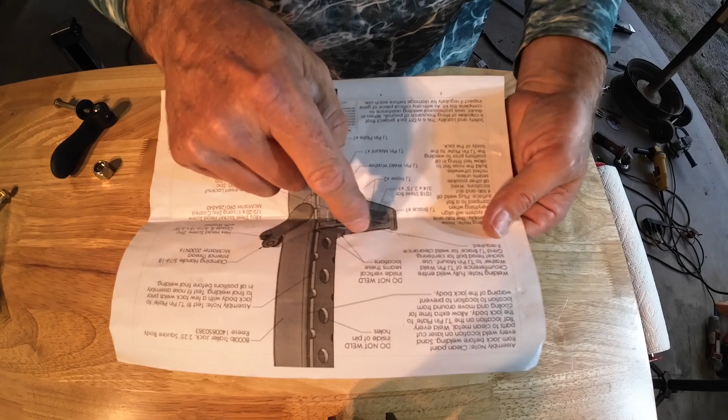Okay guys, we've got one built here and we've got one that we haven't put together. I'm going to show you just how this goes together so you can see it in your mind, and how it works. Because the directions are very good, but you have to really pay attention to every word here and all the arrows. It's a little hard to see, especially with my older eyes, and the directions are a little bit out of order, so we're going to talk about that.

I do want to talk about the mistakes we made, especially because we didn't make all the mistakes with this that you can make, but we made some, and we're going to talk about most of the mistakes you can make. And I'm not like a fabricator, but I'm not a beginning welder either. I've welded a lot of things over the last 30 years, and this has a few tricks to pay attention to, okay? So let's get into those.

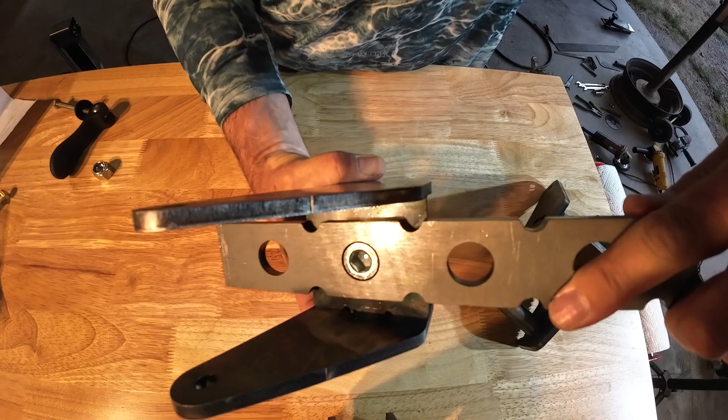All right, so this one's complete right here, and there's a few things to pay attention to. You can see that this is where this nut needs to end up, because this is what indexes into your pins on this, okay? And that's what that looks like. It goes all the way through, so I was worried it's open on that side, and I was wondering, should I weld that in? But I don't think anybody's doing that because it still seems to be plenty strong.

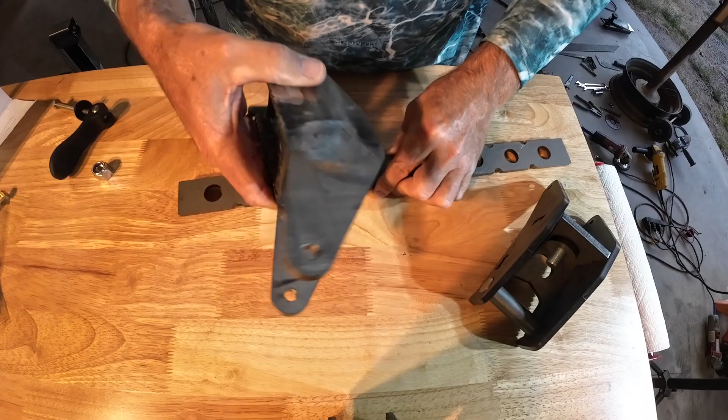And so you can adjust it, of course, up and down, and it's nice and flush, so that's the right distance. Which side you put this washer on and weld it on is important. How much you weld around it is important. Leaving that nut off when you're welding it on is important as well. How much to weld this around. We welded this cross rod here on the outside and the inside. We welded everything on both sides that we could.

Where you don't want to weld is in this side here with the small holes, okay? So don't weld that joint and that joint, because that could potentially interfere with it sliding up and down here. This is what slides against the jack side, so make sure to not weld there. So I'm just going to put this together so you can kind of see how it goes together, almost like a little puzzle. All right, so this vertical piece goes right here, okay?

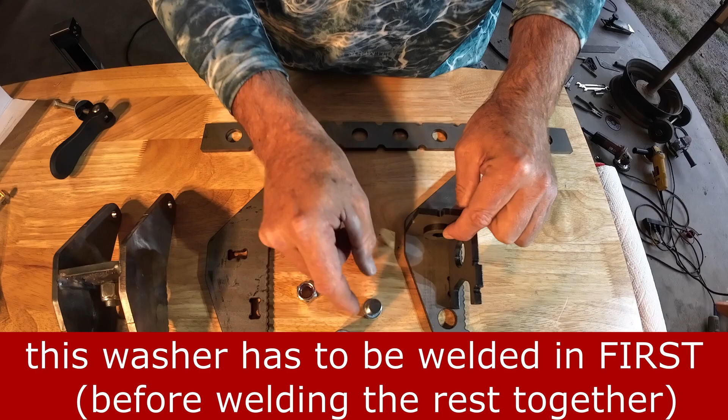This piece with the fork goes forward toward the big hole here. Now, eventually this will be welded in once you're assembling this for final welding, but this is how the bolt looks. And the nut, not going to get that screwed all the way down, but basically the bolt head goes toward the small hole, the nut goes toward the big hole, and the big steel washer goes toward the big hole as well on that side, okay? So we can just leave that sitting in there.

This piece you can drop in right here, and it's pretty tightly engineered, so you've got to kind of finagle it, mess with it a little bit to make sure it fits tight. Now this cross rod just slides through here like that, okay? Now let's pay close attention to this, because once you have it in your hands there's some play here. And you don't want to get your holes misaligned on either end. So how do we keep from doing that?

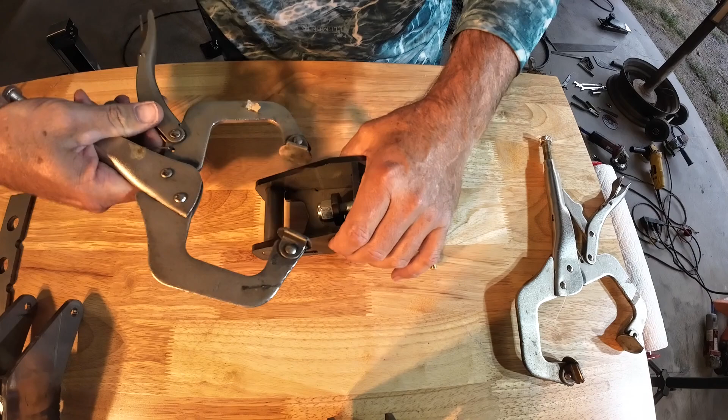The way we did it on the first one worked really well for us. We took this and set it in place. We took the little bolt that goes in the back and ran it through as well. That helps keep it in alignment. But I think the most important thing is setting it on a flat surface here, because that kind of lines everything up. That lines up this with this. And then we took our clamps and clamped it in a couple places before we tacked it.

Okay, now you clamp it here and it's going to try to spread back here, right? So we've got to clamp it sort of right past this piece, like here. Maybe a little bit tighter there. Okay, now look at that. Either my table's crooked or it moved a little bit when I clamped it. So let's unclamp it.

Just kind of hold it in place there. Clamp it there. Clamp it there. Now there's just a tiny bit of rocking, just a tiny, tiny bit. Now the question is, will these slide in and out easily? They don't cross over.

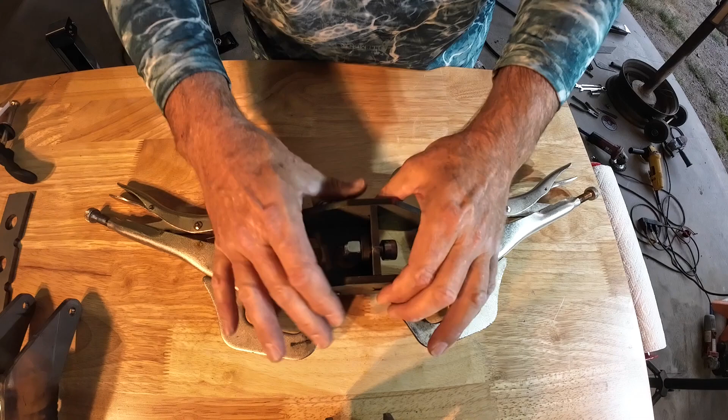They're not jamming. We're not having to drive anything in. Now that we have it true, I would go ahead and tack it here, here, here, here, then flip it over and tack it on the other side, and just get it tacked in. Maybe tack these outer sides as well, these outer holes. And then once it's all tacked in, we can take the clamps off and then start getting it burned in.

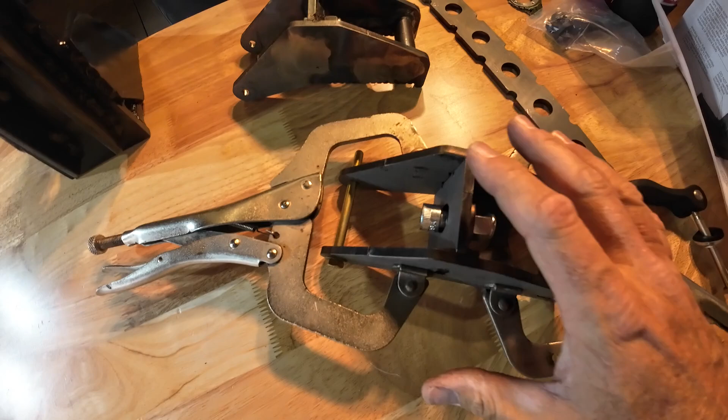Actually, on this first one, we left the clamps on as much as we could just to make sure it stayed nice and true. And this one's pretty good. And obviously, before you're going to assemble this, you're going to flap disc this down. We used, I think, 120 grit flap disc, which worked well, made it nice and shiny.

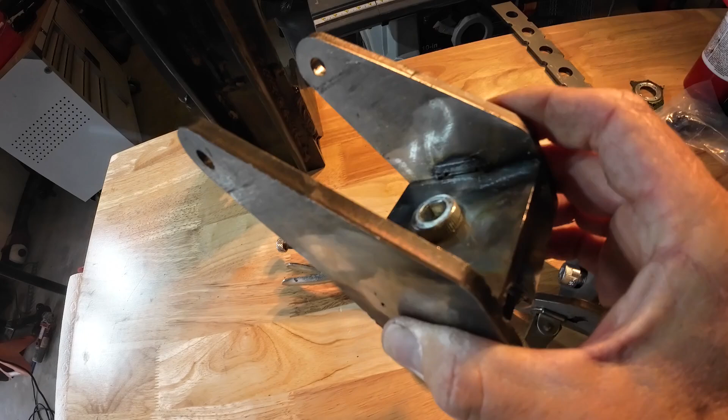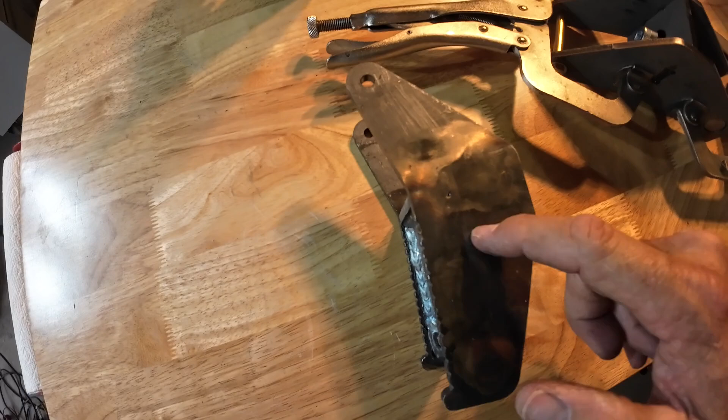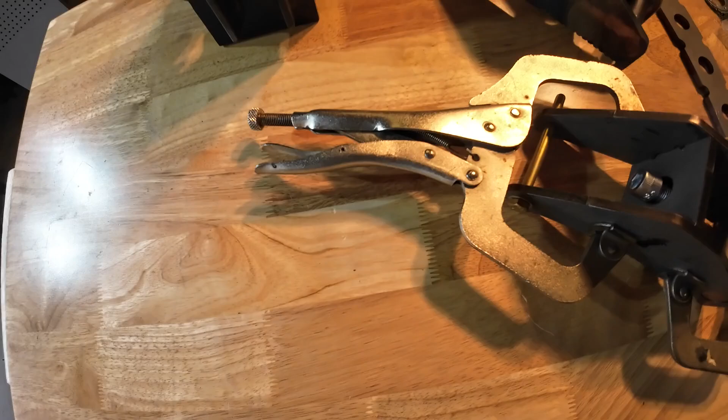Got all the mill scale off where we wanted to weld. So we just pretty much did the whole thing. You can see from here over on both sides of this, and all over on both sides of that and both sides of that bracket, the ends of this piece right here, and of course the washer as well. We did the washer.

Now, something else to pay attention to when you're welding this up is what happens when you tack this washer in and then you take your bolt out and then you're burning this in. Right here, when you weld around this washer, the tolerance between this plate and the washer is very small right there. So we actually had to grind that out to get this piece to fit together. And of course, if you're assembling it, you'll be like, why won't this piece go in? Or why can't I get it together? And it's because your weld there is too tall.

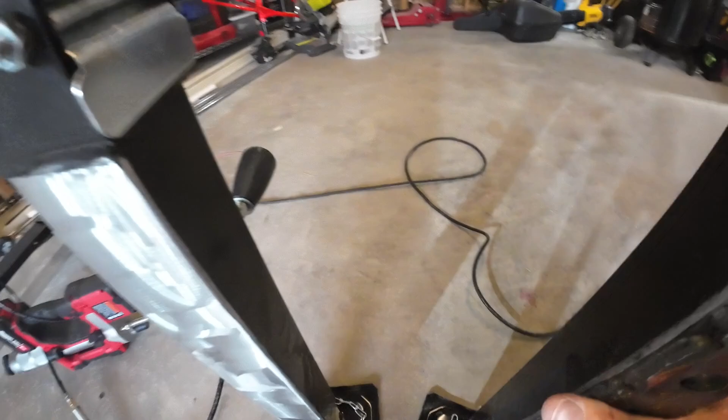Now on this one, this may not be very visible, but we had to grind the weld out on this side of the bolt back here, right there, before we assembled it. Now, another mistake we made on this first build was we, of course, squared this up. We're going to go over that later in the video, how we did that. You don't want this piece too high up here because the ears on the side of your foot kind of angle up, and then you won't be able to get it in place, okay?

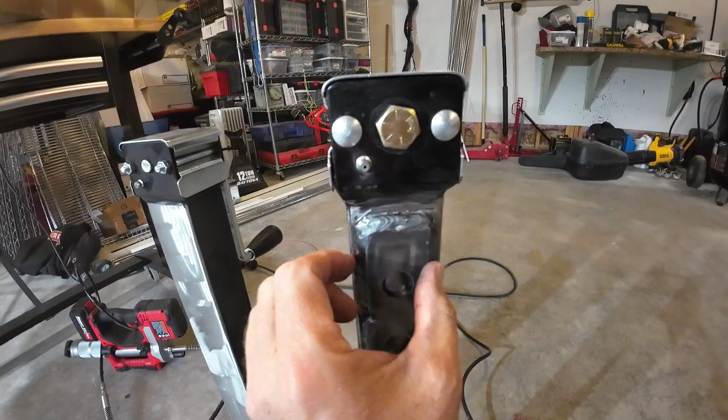So you have to sort of set this in place, put your foot on this highest pin here, right here, and then slide it up until the ears on the side hit right there. And then we just dropped it down maybe a couple millimeters, and that's where we clamped this piece right here onto the jack itself. Okay, that gives the foot plenty of room. Okay, so once we got this centered, we used the caliper and the little rod that slides out the end of the caliper to center it perfectly.

And we got it clamped down. We clamped it once in the middle, once on the end here. Double checked the foot. We also double checked the tolerances to make sure it was centered again. We double and triple checked this to make sure it was perfectly centered. And then we had 3 clamps on it, 1 high, 1 in the middle, and 1 low. Now, when we went to burn it in, we tacked here, and then we tacked both sides of the middle pretty quickly to try to keep it from lifting.

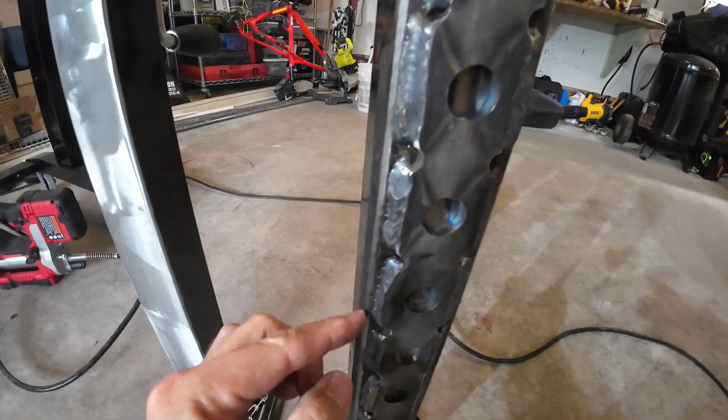And that's another thing you want to pay attention to, is you really want to tack it quickly so that as it cools and shrinks, it doesn't try to warp your metal or cause this to flex out. So when you go to tack it on the side, make sure it's still nice and tight against your jack body, okay?

Then we welded it in this position, and I wouldn't recommend that now, looking back, because what happened to us was, as my nephew's welding this, he burned in one side here, burned in here, burned in here. And we really didn't let it cool much, and we thought that was a problem, but I don't think it was that big of a problem in the end. Then he welded this side here, and then came back and kind of staggered here, here, across, here, here. And then we got it all welded in, we got it all together.

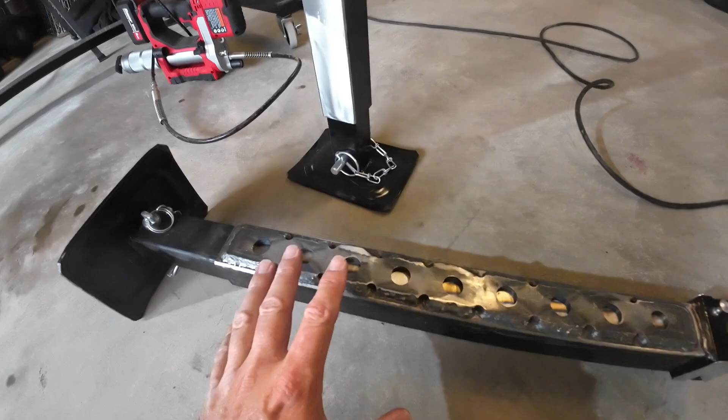We went out to test it before he went to paint it, and then we were like, whoa, it won't jack at all. And we were cranking on the jack, and it was totally frozen between this piece and this piece. And we thought, oh, we didn't allow enough cool time, and it melted all the paint inside, and the paint's all fused, okay? So we broke it loose.

We finally got it broken loose, and it was real resistant for the first, like, I don't know, maybe 4 or 5 inches of travel, and then it got real easy. So we thought, oh, we melted all the paint inside, and there's no way to really get this apart without taking it apart up here, which we did.

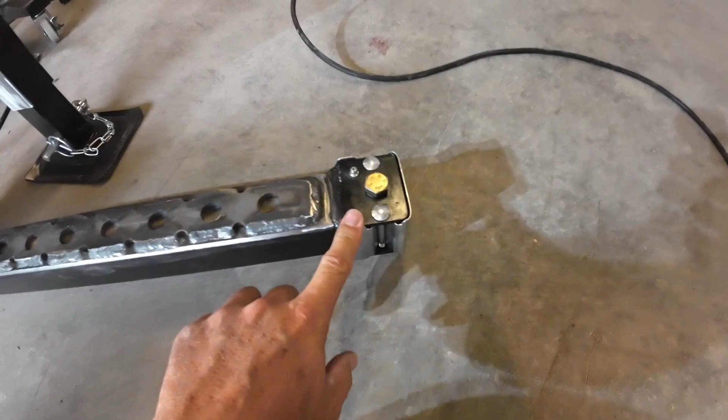But looking inside, we found out that, yeah, the paint melted inside, but that wasn't the problem. The problem was way up in here, in one of these welds, it had gotten hot enough to burn through or to melt out on the inside of this thinner steel of the jack, okay? And it made a little knob inside.

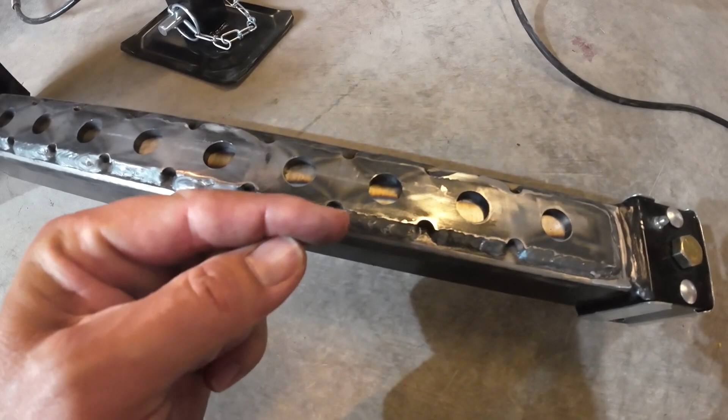It melted just enough, and I don't know if my nephew welded through or welded a hole. He never mentioned that he saw a hole that he had to fill, but if that happens, you got to be super careful because you can't grind this out inside, all right? So that little knob caused this piece right here, as it slides up, it slid up fine, and once it hit that little knob right in the corner, it would kind of jam and it would get real resistant.

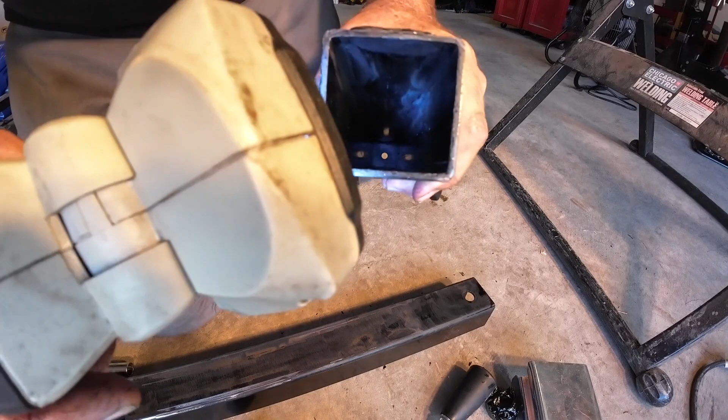Okay, so looking up inside here, in this upper corner up here, it might not come out on the camera, but I can see a little knob, a little bump, a little piece of metal that's kind of melted through where we got a little too hot when we were welding, and it melted a piece through there. And it's just a little bump, but it's enough to catch this piece as it slides up inside there.

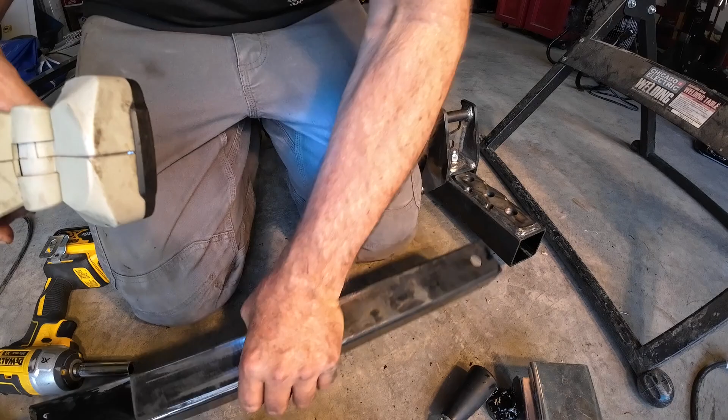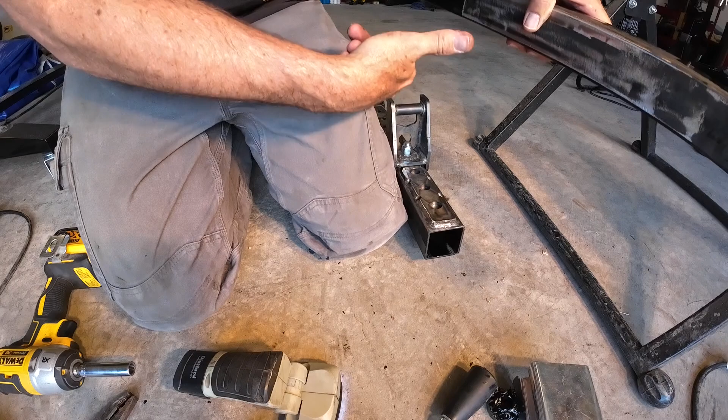And so in this corner up here, that's right where this side slides, and you can see right there where all the paint's worn off as it's gone past there, okay? So that's where it's really binding, is right there. There's no way to get that out now unless I cut out the weld and cut out the piece and re-weld it back and hope nothing drips down inside. I think that's too much drama.

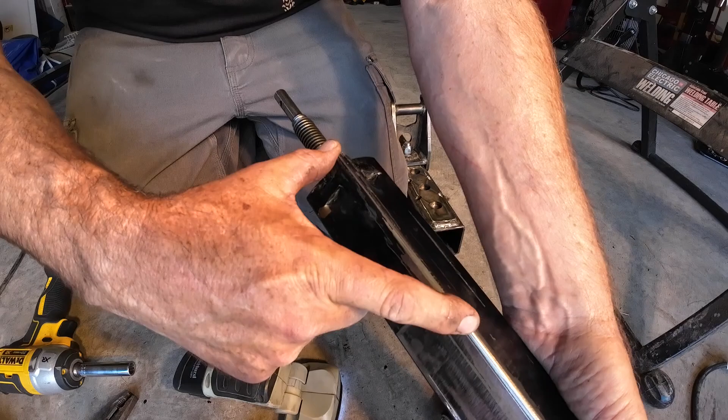I'm gonna go ahead and try to salvage this by grinding right here in this upper part, maybe from here to here, and grind that down just a little bit. Just take a little edge off there, put a little bevel on that, and hopefully that will take care of it and it'll slide better. But it took a little bit to wear it in. I had to make a few runs up and down, up and down, to get that to wear in. So don't make that mistake.

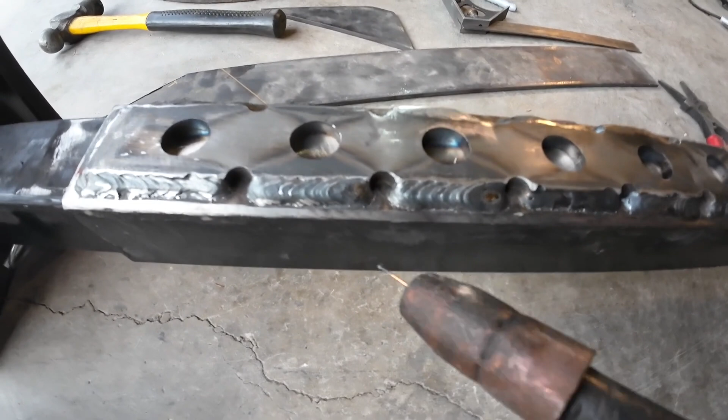So the way we're going to prevent it on this one, when we're welding this, is because this is thinner steel on the jack tube and this is thicker steel, we're going to remedy that. Let me show you how. Okay, so I got a little excessive stick out, but that's just for an example here so I can show you what we would do different on the next one. Now, you got a 90-degree angle here. So before this was welded, this was 90 degrees.

And I tend to use just like 45 degrees. And I tend to do cursive E's just because that's what I was taught as a stick welder from 30-something years ago. And so I'll start in the bottom, build my heat, kind of wrap up, and then catch this metal, and then come down and catch this metal. Well, I'm spending a lot more time on the base metal doing that. And that's how I taught my nephew, because it's an easy technique. It's not hard to learn.

None of our welds are perfect, but when we're dragging down, a lot more of the heat is staying on this thinner metal, okay? And so in that cursive E technique, we're spending less time up here and more time down here. And so that's sort of what it's looking like, right? And so we're spending more time burning here on this thinner metal, which can cause it to deform inside or even start to melt through and cause a little bubble or a little bump on the inside. And that's kind of catastrophic for this jack. So you want to be careful with your welding.

Now, what we're going to do to remedy that is two things. One thing is we're going to stand it up on its end like this on this next project, so that when we spend more time at the bottom, we're spending more time on the heavy steel. This is 1/4 inch, and this is probably 1/8 inch right here. Okay, so this 1/4 inch steel, we're going to spend a little more time there, and then just drag up and catch the 1/8 steel. Spend more time melting the 1/4, less time on the 1/8 inch, and just more time down here, less, more, less.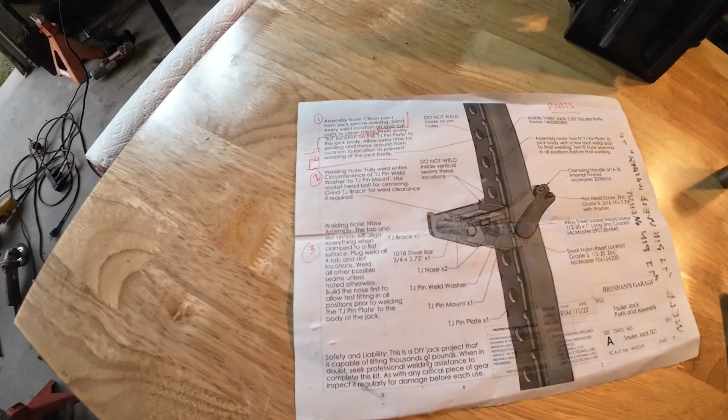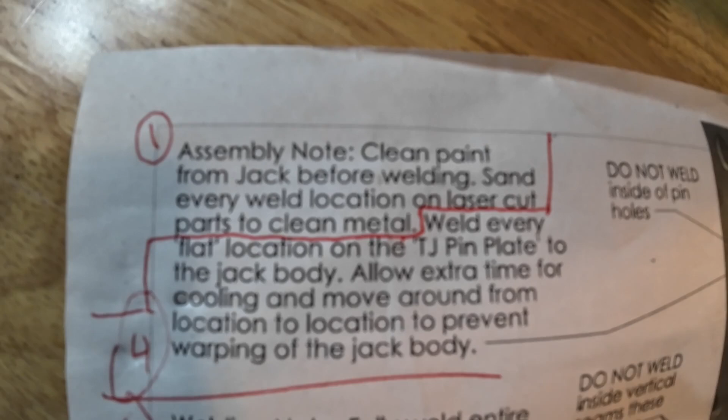I encourage you to always check your gap. Make sure you don't have a gap here as you're welding it, because you can fix it before you weld it. But once you have a gap here, it's going to be crooked here and it may not index well later. Okay, and the directions, everything's here, but to me this was a little bit out of order as far as what to do, and it was a little confusing to me until I watched some videos and had to pay more attention to it.

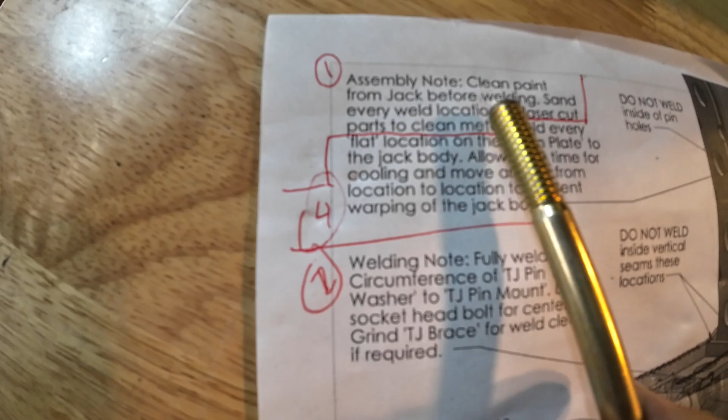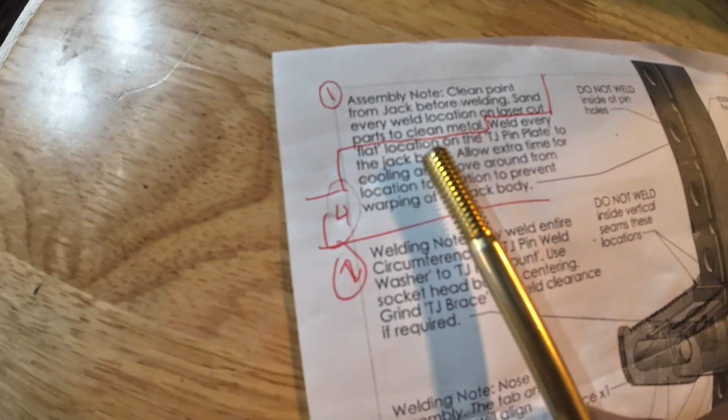As far as this goes, this is part number 1. Clean the paint from the jack before welding. Sand every weld location on laser cut parts to clean metal. So you want to clean all these pieces, right? And go ahead and grind this part. That's step number 1. They mention right here, weld every flat location on the TJ pin plate to the jack body. Allow extra time for cooling and move around from location.

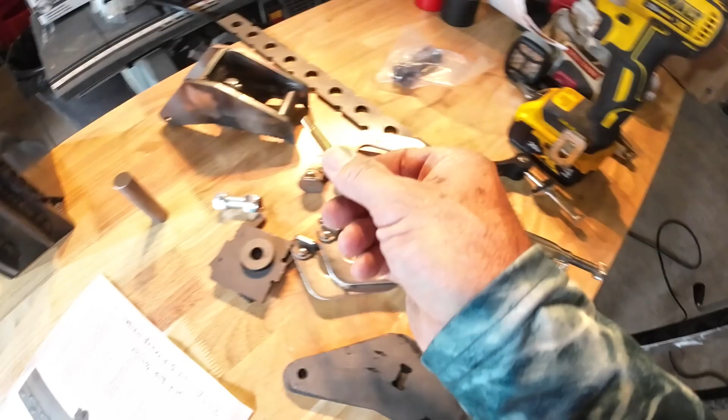Okay, so you can't weld this pin plate on the jack body until you build this thing, okay? Because this is how you locate that. That's how you make sure when you tack weld this on, or when you clamp it on, and then you test fit your foot on that, you have to have that assembled. So go down here, do that first part, but then come down here.

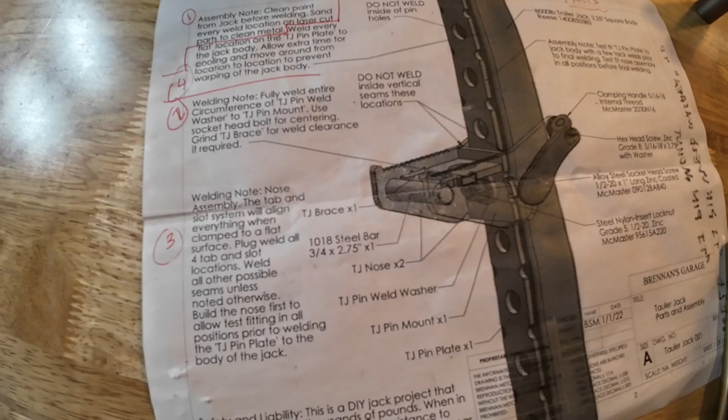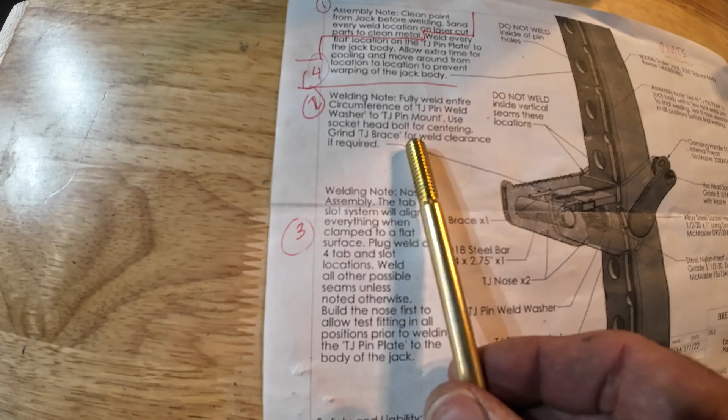It says fully weld entire circumference of TJ pin weld washer to the TJ pin mount. So this is the weld washer, and this is the pin mount, okay? So you want to weld this onto here. Use the socket head bolt for centering. Then it says grind the TJ brace for weld clearance if required. So this TJ brace for weld clearance is what they're talking about. If you burn this in all the way around and your weld sticks out all the way around, you're going to have to grind one edge of it right here so that it'll actually fit together.

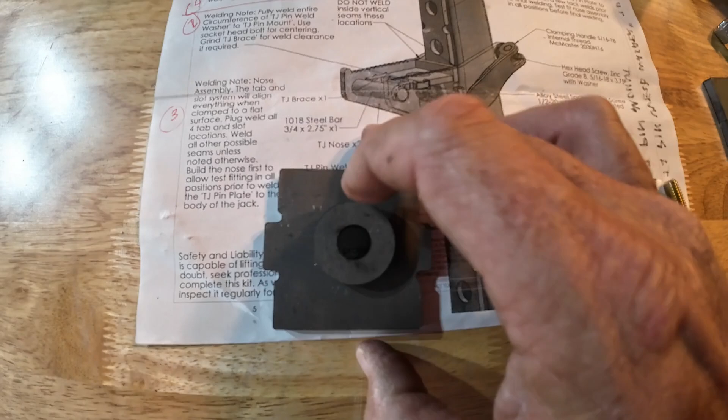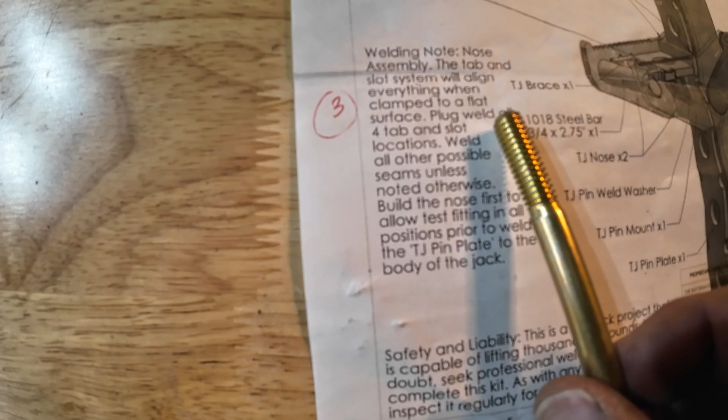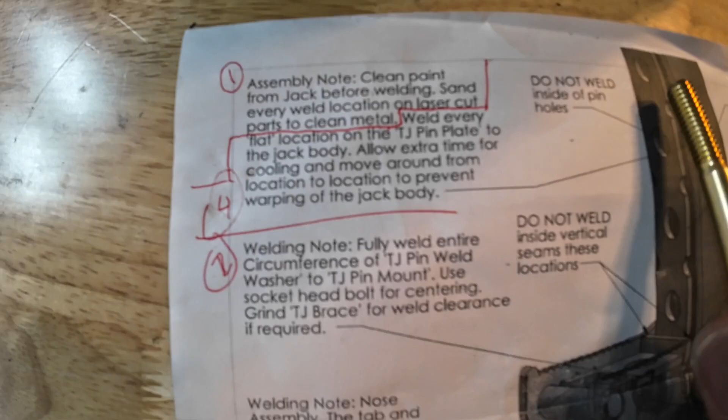This is the third step here, the nose assembly, or what I've been calling the foot. The tab and slot system will align everything when clamped to a flat surface. Plug weld all 4 tabs, blah, blah, blah. So you can do this part, and then you want to come back up. This is number 4 here. Then weld every flat location on the TJ pin plate. This long piece is the TJ pin plate. And then you want to weld every flat location, okay?

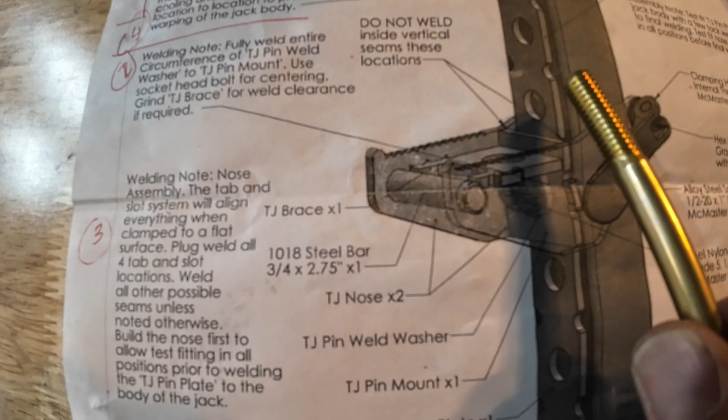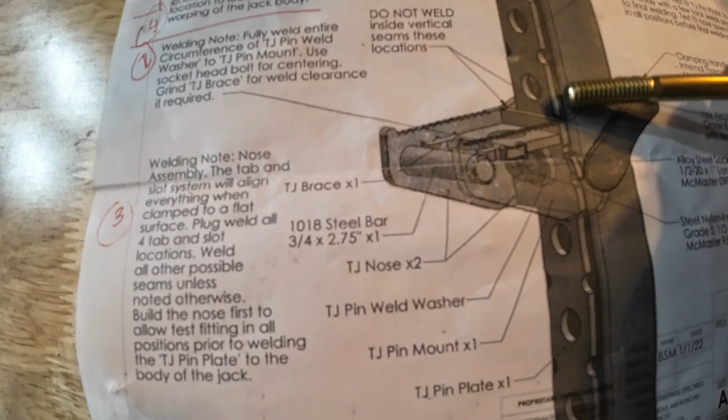So I see people burning in right here in this middle part. I don't know why they're saying just weld the flat location, except that if you weld in here, that may cause it to warp, and this is more structurally sound out toward the edge here. That's a guess. Okay, it's all welded on. We know it fits, but we're just going to put it together here and see how this little clamping lever goes.

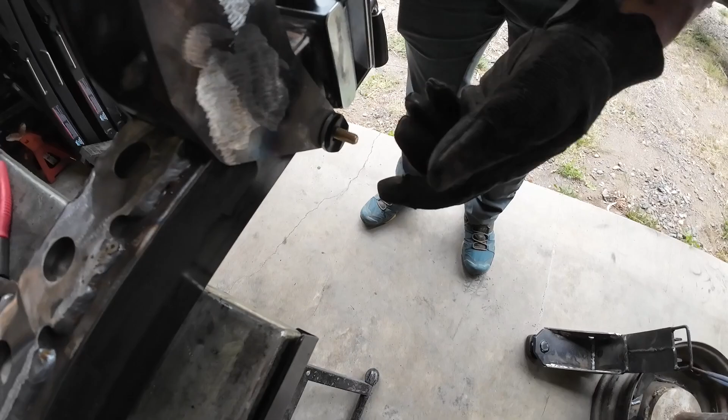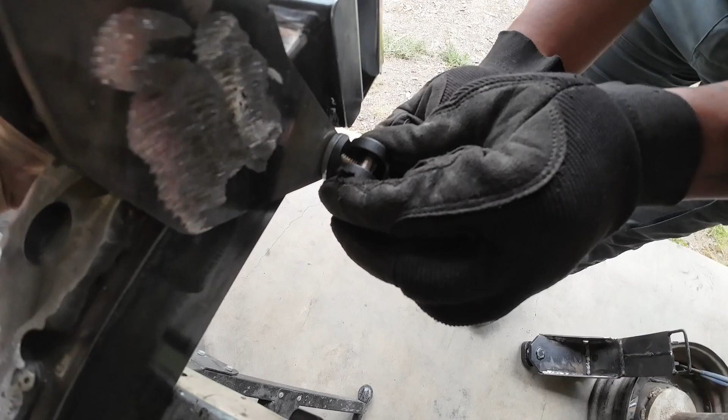And then this bigger washer goes on this side. Put this. Yeah, and then that goes inside this. And I'll hold the nut on the other side. Actually, I can turn the nut from the other side. That's a little easier if you turn the nut from the other side rather than trying to turn that. You threading up? Yep, seems to be.

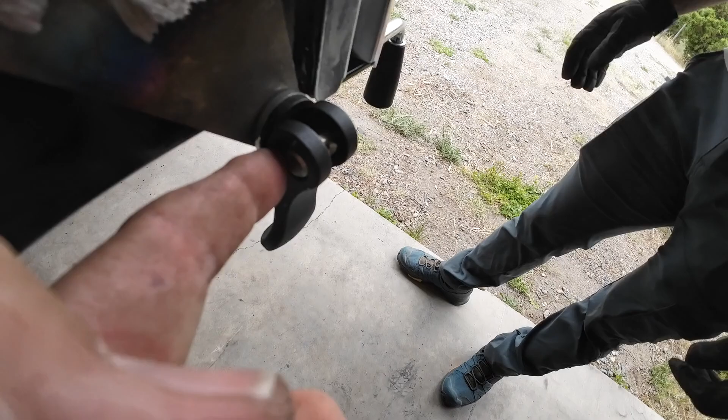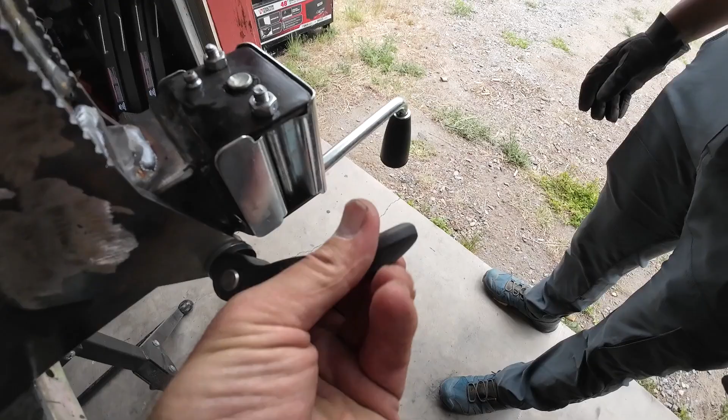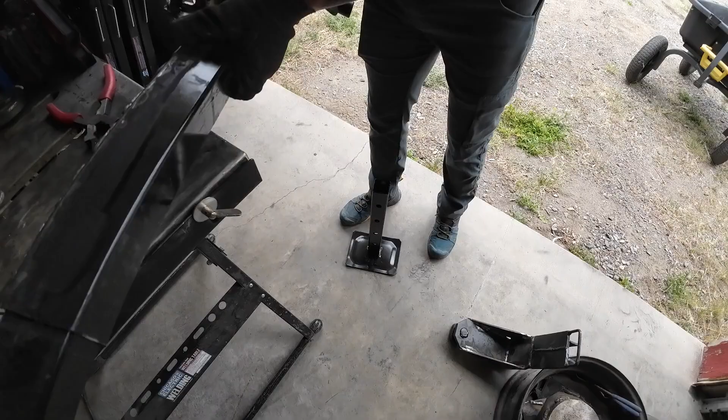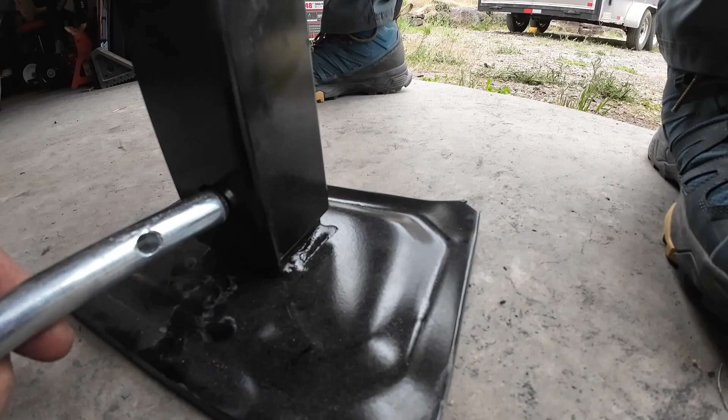So this has a narrow side and a wide side. So right now it's on the wide side, so that's the cam side, right? And you can uncam it by turning it. So the narrow side, see the narrow side right there, fits toward the jack, and then you can tighten it up wherever you want. All right. Looking good. Upper, oh, there's the hole right there. Okay.

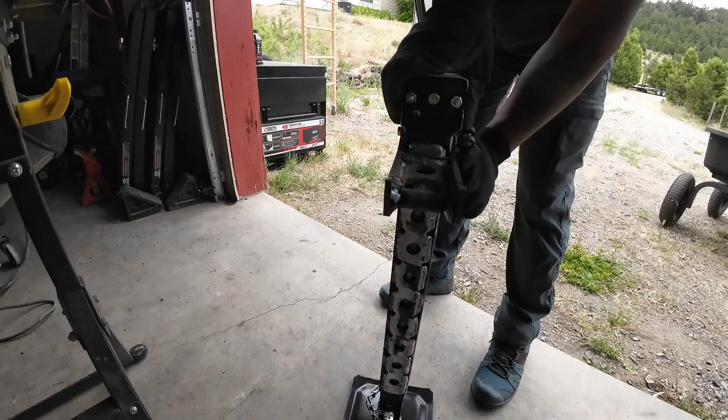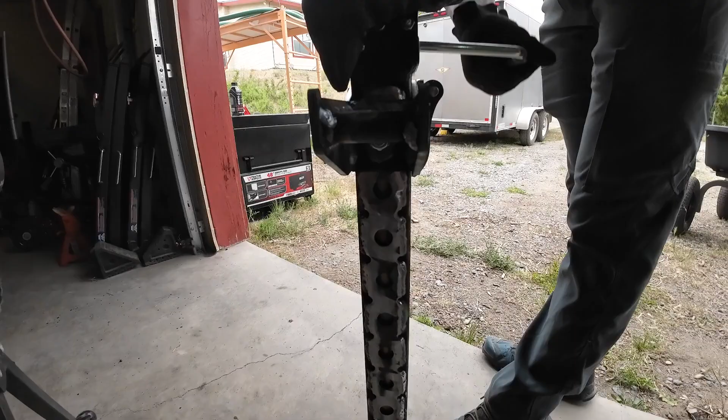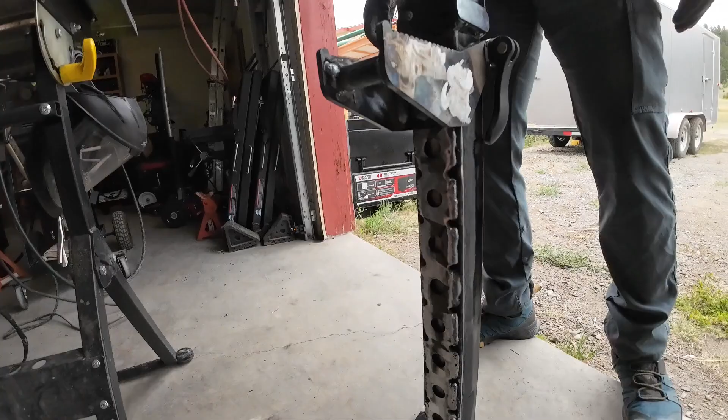Well, this one cranks a heck of a lot easier than the last one. Yeah. It sounds like you didn't burn through the metal. That's good. It's probably a little stiffer than the original jack, is my guess, and that's just because there's melted paint inside that you're kind of overcoming. So, you want to try it out on the Jeep first? Or the Taco? Let's try it on the Jeep.